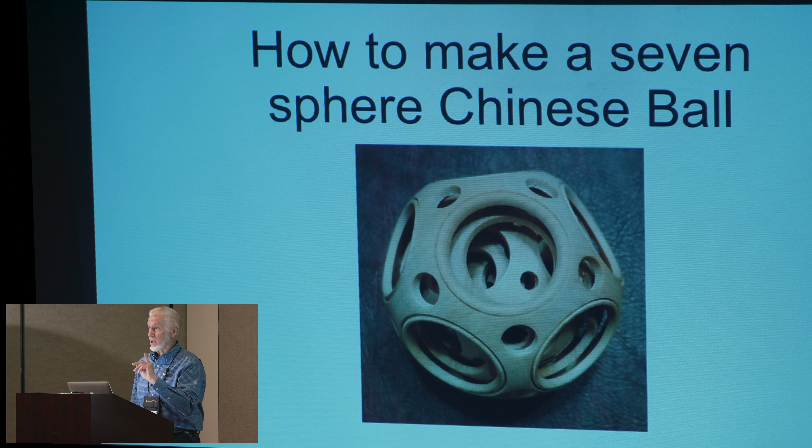But I thought we'd go over how we made the Chinese balls using the kit that I have fabricated.

First thing is to make the ball. And the biggest issue here is to make that ball as concentric as possible. Tolerances of .002 inch is not out of line.

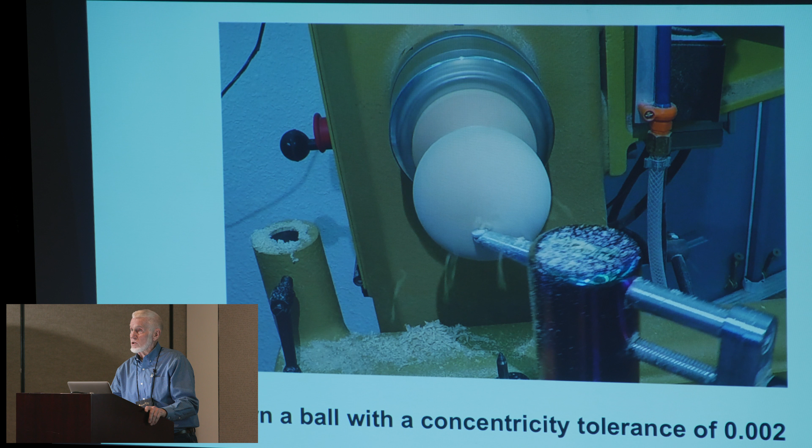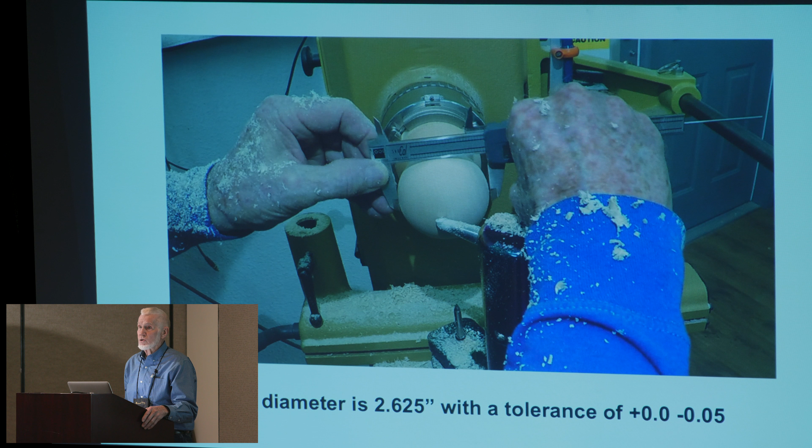Second thing is to make the ball the correct diameter so that it fits the chuck nice and tight, but not overly tight, and there's the tolerances for that. What I normally do when I'm turning a ball is actually use the chuck as the final test to make sure it's going to fit properly.

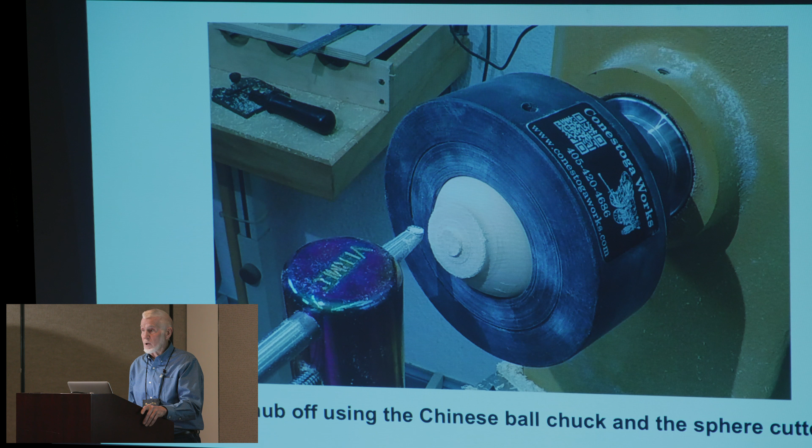Everyone wants to know how you cut that nub off the ball after you turn it with a sphere cutting tool. Typically what I do is mount it into my Chinese ball chuck, set it off center, set the sphere cutting tool back in alignment with the ball, and basically cut the end off. You end up with a very nice shaped ball.

When I first started doing this, when Jean-Claude did his presentation at the previous symposium, I talked to Jean-Claude, and he made it sound like the cutting was the hard part. What I've found out is that laying out those 12 holes is without doubt the most difficult part of cutting the ball. The actual cutting itself is quite simple.

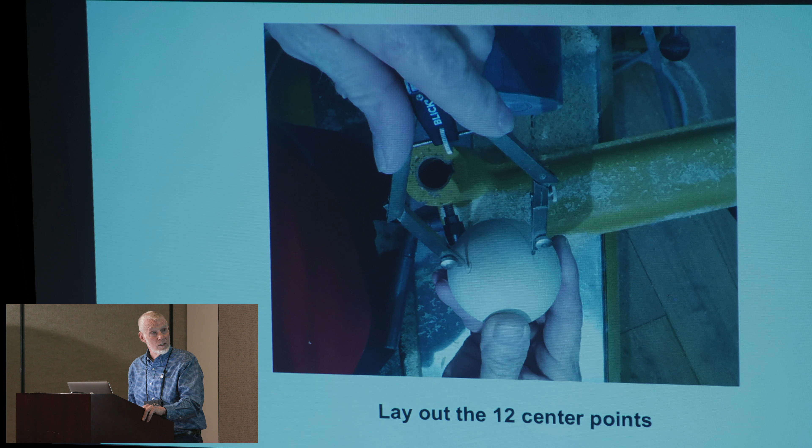First thing you do is identify a point on the end grain, and then you draw a circle using one of the formulas for a dodecahedron and all that stuff. We're not going to go into that at this point, but basically you draw a circle and then divide that circle into 5 equal parts.

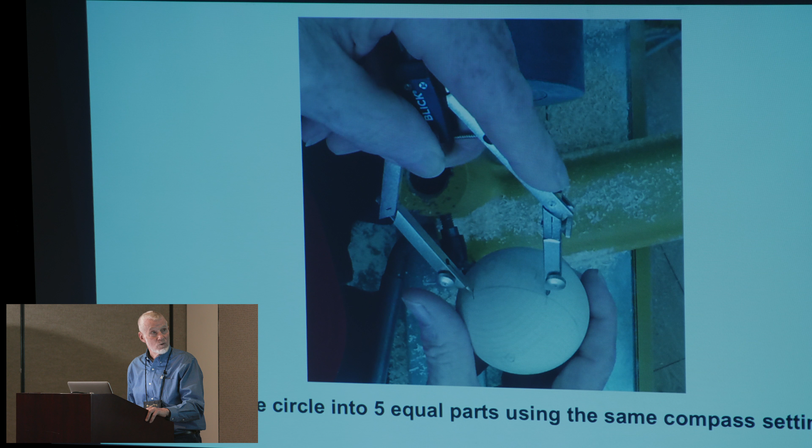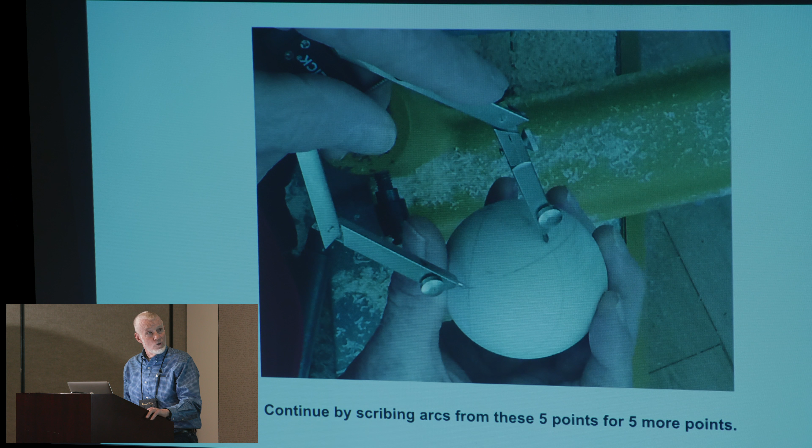Sounds very simple. After you erase it about 25 times and start over again, you finally get it where you want it. Then you take those 5 points and draw intersecting lines to come up with a second set of 5 points, and from that you draw the 12th point.

That's when you realize - after I tried it on several occasions using one of Jean-Claude's fixtures, I finally called him up in France and said, 'How do you do this?' He said, 'Well, when you get done, you have to fudge a little bit.' That is kind of an understatement.

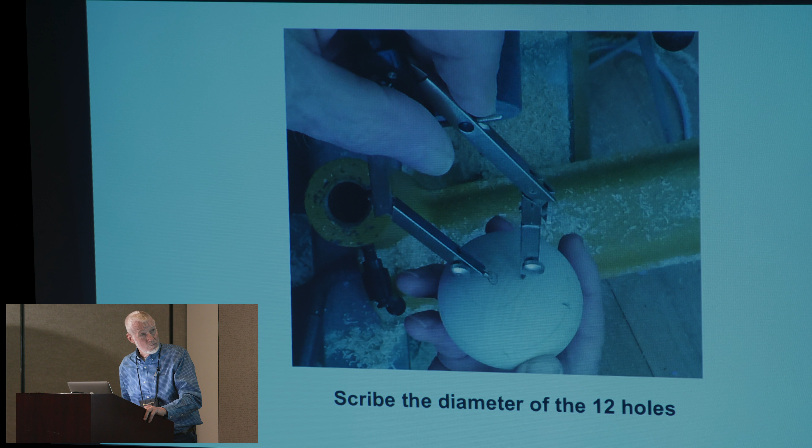You have to fudge a lot, but the bottom line is you want 12 holes that are very, very accurately distanced from each other. Once you get that, then you draw the outside diameter of each one of the holes so you know exactly how large to cut them.

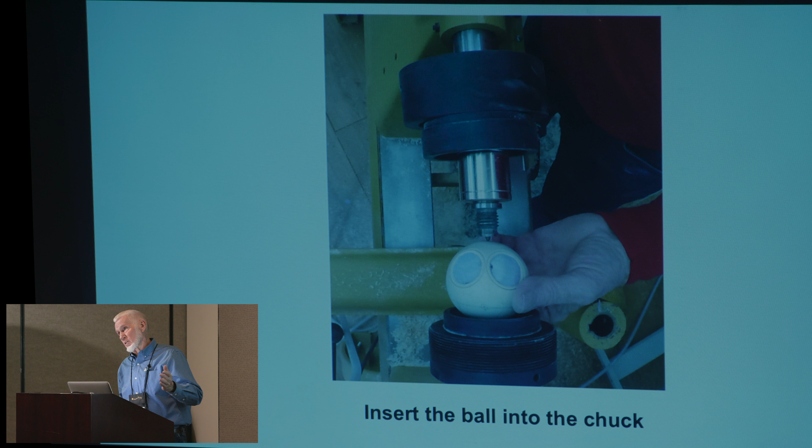You start by installing it into your chuck. You use the center point on the tailstock as the exact center for that hole. I normally do a little indent in each one of the centers of the holes so that you can use that tailstock to push it into the chuck and line it up.

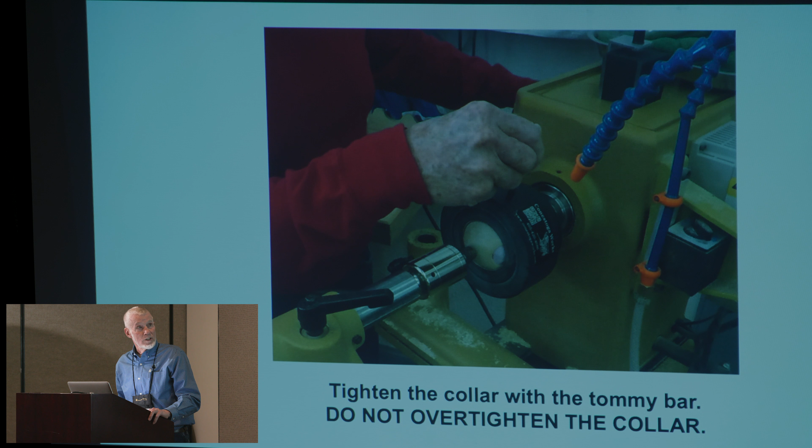Then you simply install the flange on there to hold the ball into the chuck, and tighten it up nice and snug, but you don't over tighten it. It's amazing how tight, or how tough, the ball is actually inside the chuck. I've had 12 holes cut and you can't crush that ball.

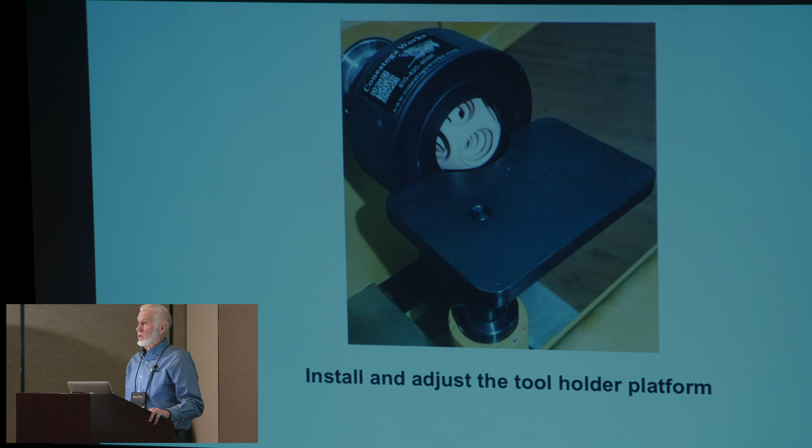Then you install the tool holder platform, and the only thing really critical here is to make sure that the top of your cutting tool is at dead center vertically. That is extremely critical when cutting the ball.

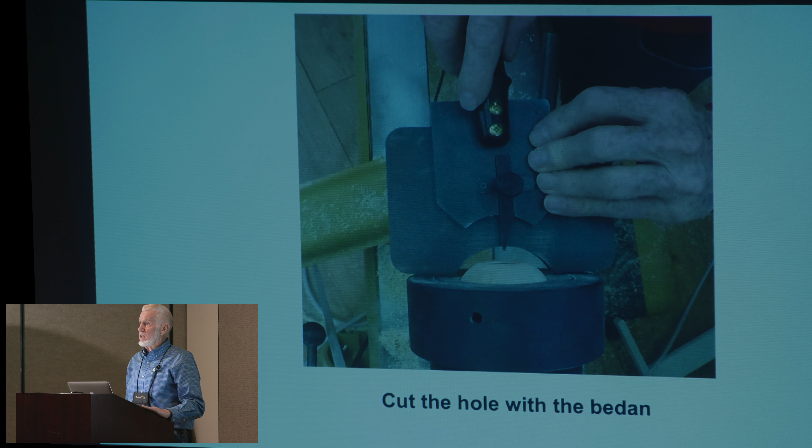Then you take your bedan, put it into your tool holder, and start plunging it into the ball. You go to the left hand of center. You only cut with the end of the bedan, you don't cut with the side.

You continue that until you get your tapered hole, and from that point you start finishing up the hole, cutting it to that outside diameter. That's why it's so critical to mark those outside diameters of the holes when you're laying out the ball. Ask me how I know.

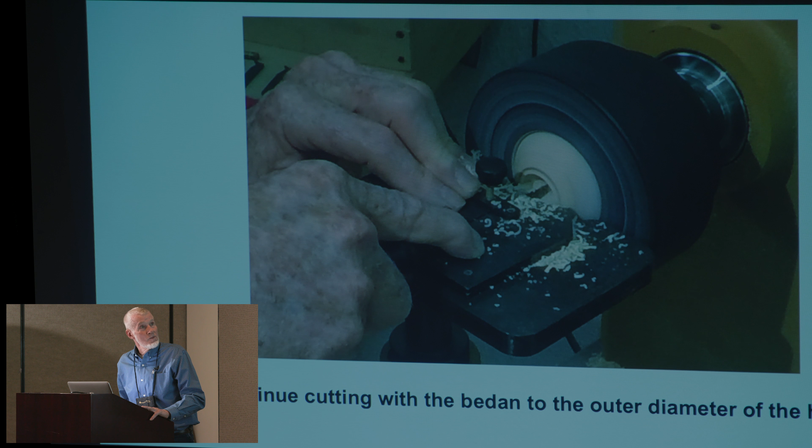Once you get that done, then you start cutting your grooves. You start with the inside groove, what I refer to as cutter number 1. You start on the extreme right-hand side of the ball, slide the cutter in... is there a pointer around here?

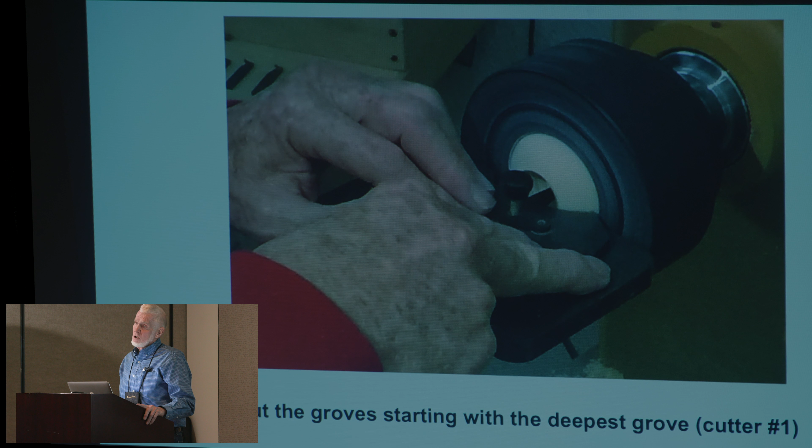The most critical thing is your tool holder must ride against the edge of the ball. You simply swing it around to the left and cut the first groove, swing it back to the right, put the next cutter in, and cut that groove the same way. You do that with all 6 cutters. Notice the tool holder is basically burnishing the edge of the ball. If everything's done right, when you get done, the outside edge of the ball doesn't need to be sanded because it's nice and smooth.

Charles, what speed are you running? I typically turn the balls about 1,000 RPM. I've gone everything from 500 to 2,000, and 1,000 is ideal. You've got to remember, basically you're doing a scraping action here. For you guys, the dyed-in-the-wool cutters who hate to hear the word scraping, it works.

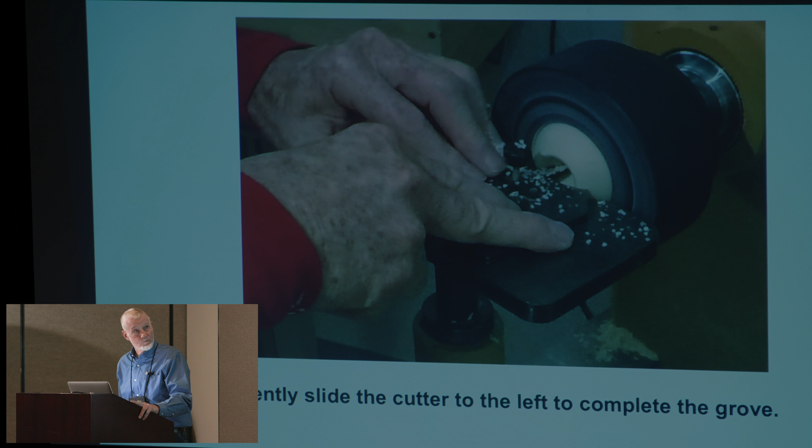You do the 6 cutters, and once you get your 6 grooves cut, if you want to embellish the outside edge of the ball by cutting a bead on it, you do that. I use the D-Way tools by Dave. They're absolutely phenomenal tools to cut that outside bead.

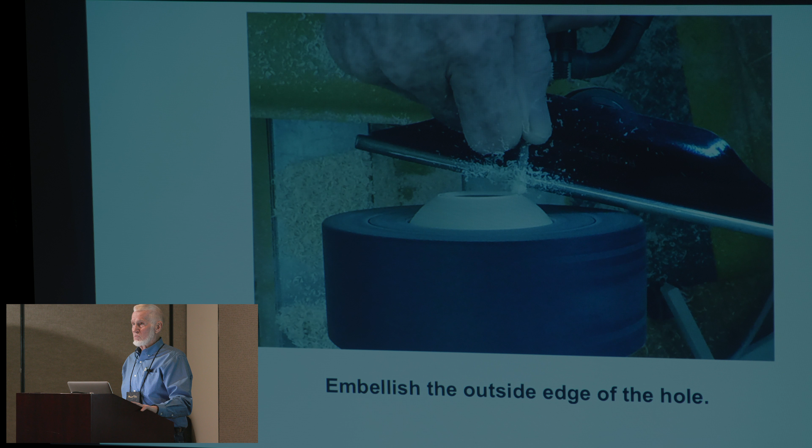At this point you want to go ahead and sand your hole, sand the surface around the bead, because once you get done with this, you never want to try to reset it into the chuck again. David Springett talks about taking the ball out, doing it, and resetting it over and over. Gentlemen, if you've got that much time, you need to find something else to do.

Once you cut a couple holes in the ball, typically I'll cut hole number 1 at the end grain, then hole number 12 at the other end of the ball, also end grain, because that's where you have the most strength left as far as the surface of the material is concerned. But once you cut about 2 or 3 holes, you have to start plugging those holes, because those inner spheres will start vibrating on you, and you'll have a disaster on your hands.

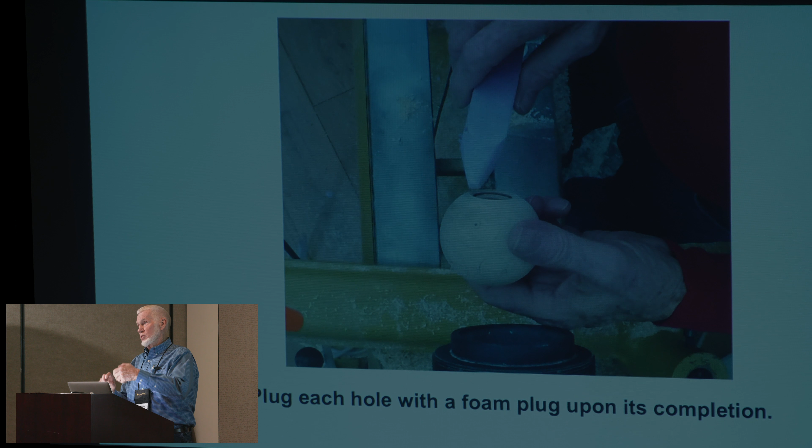Following Jean-Claude's recommendation, and just about all the guys in Europe are doing this, use Dow board, 1-inch Dow insulation board. You simply make a cone with your plug, stick it into the hole, kind of twist it in, cut it off, trim the outside edges, and press it into the hole just as snug as you can get it.

After you pull these plugs out, you'll be amazed at how the cutters will cut the 6 grooves in the foam. But the one thing you don't want is that foam projecting out to the point that when you install the ball inside the chuck, you get a piece of foam between the edge of the ball and the chuck.

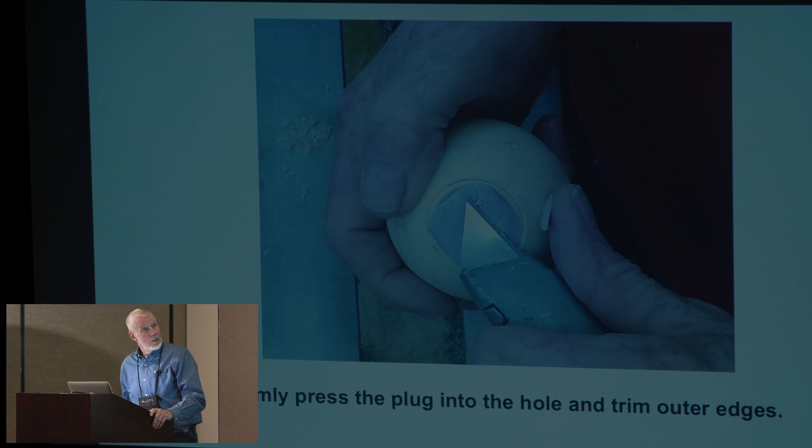Once you do that, you do it with all 12 holes, and you remove the plugs, and you can sand what little needs to be sanded at that time.

I was talking to Al earlier. He has one of my kits, and he sticks a little piece of sandpaper in between the first and second layer. You hit those inner layers with an air chuck at an angle, and those inner balls would just spin like crazy—it's like using a power sander to sand the inside balls.

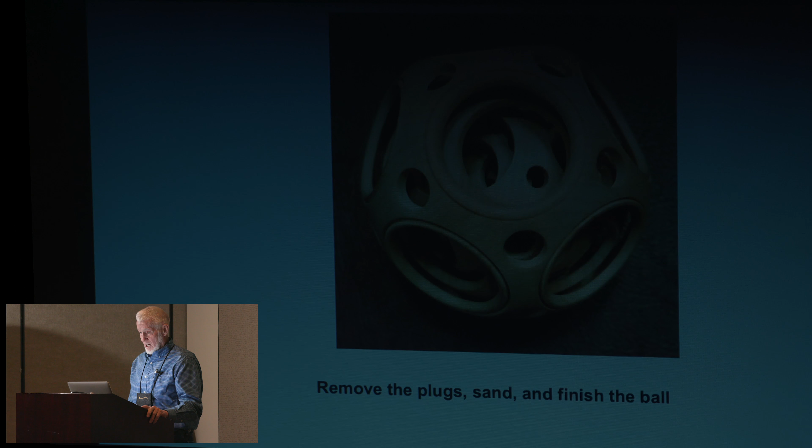This particular ball has satellite holes cut into it. If you're going to cut satellite holes into the balls, you want to do that before you actually start cutting the 12 holes. And that's how you make a Chinese ball.